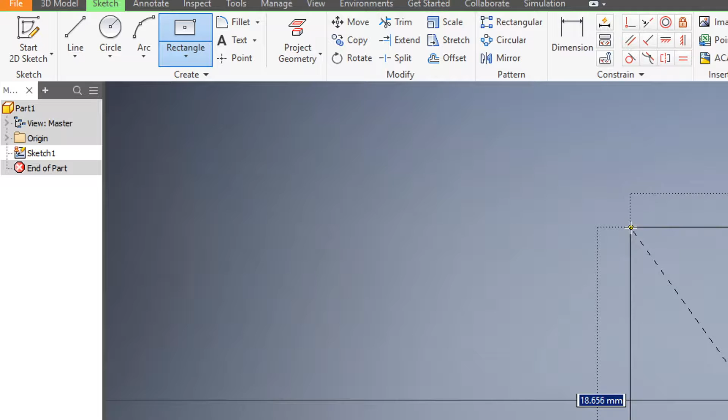This guide works in any mechanical CAD software. First, let's design the bottom part of the ProtoSwitchBoard. We start with an 86mm square, with a thickness of 2.1mm.

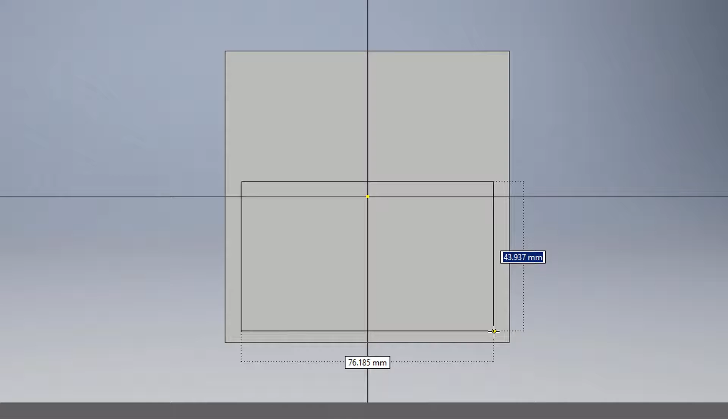On top of that, we add a block that holds a business card. It doesn't need to be the exact size of the card. 83 by 53mm rectangle covers all the label openings perfectly. Let's center it horizontally and add a small margin in the bottom. The margin will be 1.5mm in this case.

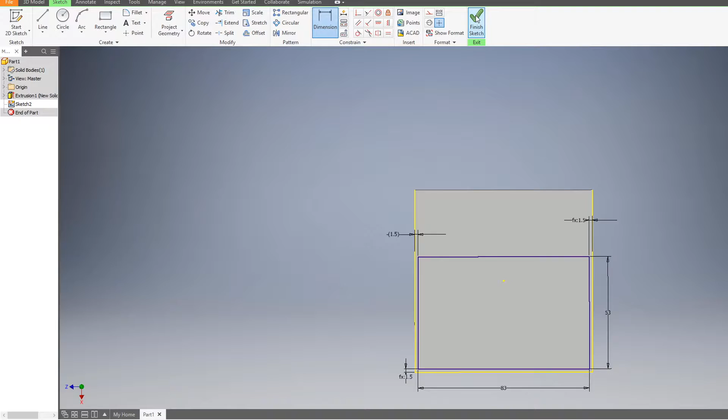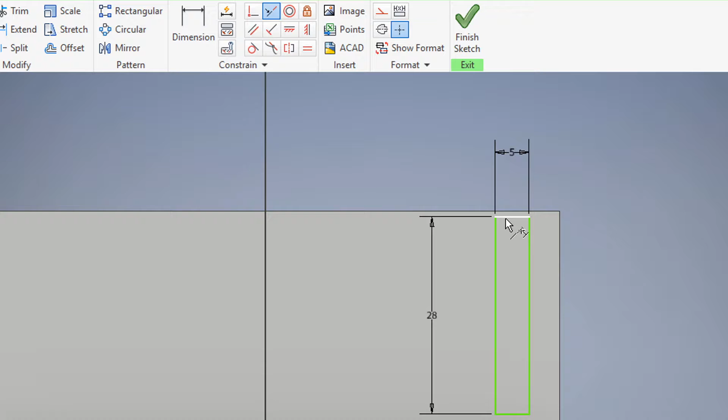3mm high will be enough. We will fit everything later when designing the top part. Now we need some cutouts for the rows of pins on the PCB. A 5 by 28mm cut is enough. The cut goes flush to the top part.

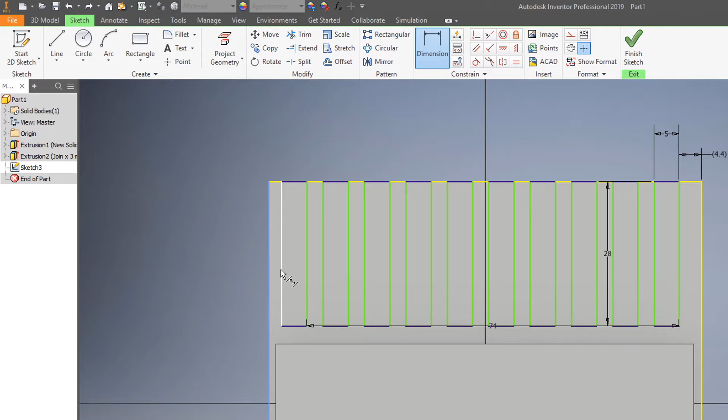And we need 10 of the same. There is about 68mm between the first and last rows of pins, so we have to space them around that number. For now, 71mm between the first and last will work okay. Let's center them and select all of them for being extruded against the base.

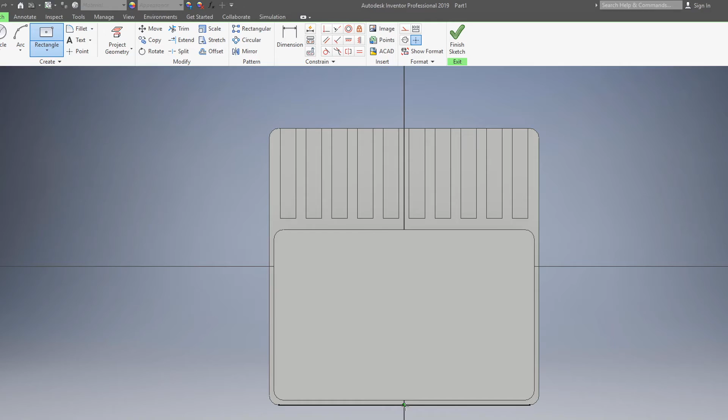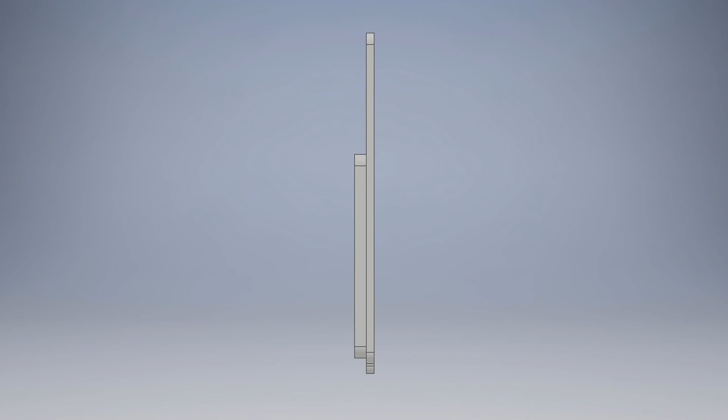To finish the design, let's add some fillets to the base and card holder, and a handle to extract the base from the cover. It's going to be a small 2.5 by 30mm extra piece at the bottom. With some rounding, and that's it! The bottom part of the ProtoSwitchBoard.